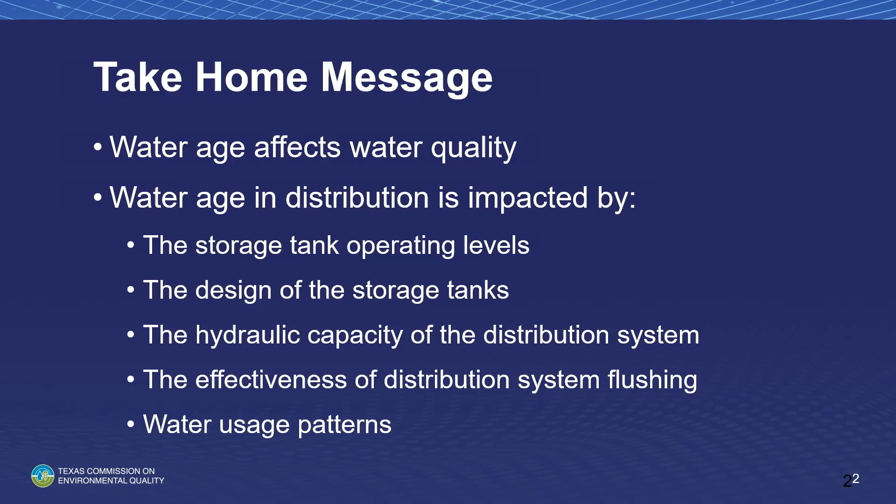What I want to leave with today is just a couple of take-home messages. Water age affects water quality, as you guys all know, and water age in the distribution system is impacted by the way you operate your storage tanks, how the storage tanks themselves are designed, the size of the lines in your distribution system, their hydraulic capacity, and the water consumption, and the effectiveness of your distribution system flushing program. We're going to try to cover all of these things very quickly today, but like I said, if I miss something, come up at the end and augment.

Excessive water age in storage or distribution, as you guys typically experience, results in lower disinfectant residuals throughout the distribution system. And it can be localized, not just the entire system. You can have localized pockets. As the water ages, disinfection byproduct concentrations gradually rise. So, well, for THM levels, they gradually rise. For HAA levels, they gradually decline. But you might see a difficulty in meeting your THM requirements if the water age in the distribution system gets really excessive.

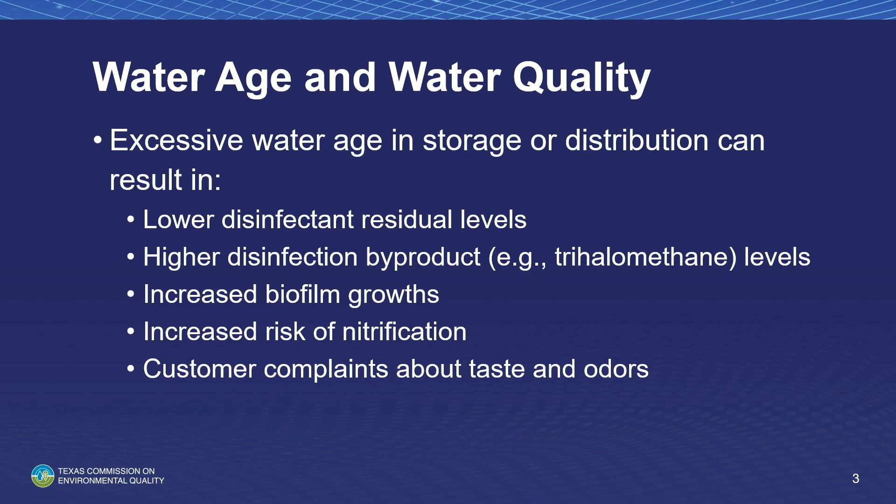As the disinfectant residual declines, biofilm growth increases. So, in association with the loss of disinfectant residual, especially if you're using chloramines, the chloramines convert and release ammonia. And there are certain types of bacteria that like to eat ammonia. So you'll get an increase in ammonia-oxidizing bacteria, and have nitrification problems in your distribution system.

And typically, if you can keep your chlorine residuals, your disinfectant residuals, fairly stable within a range of plus or minus 0.7, 0.8 milligrams per liter, whatever your normal is, you're not going to see a lot of customer complaints because they acclimate to the quality of water they're receiving. The quality changes, you start getting customer complaints.

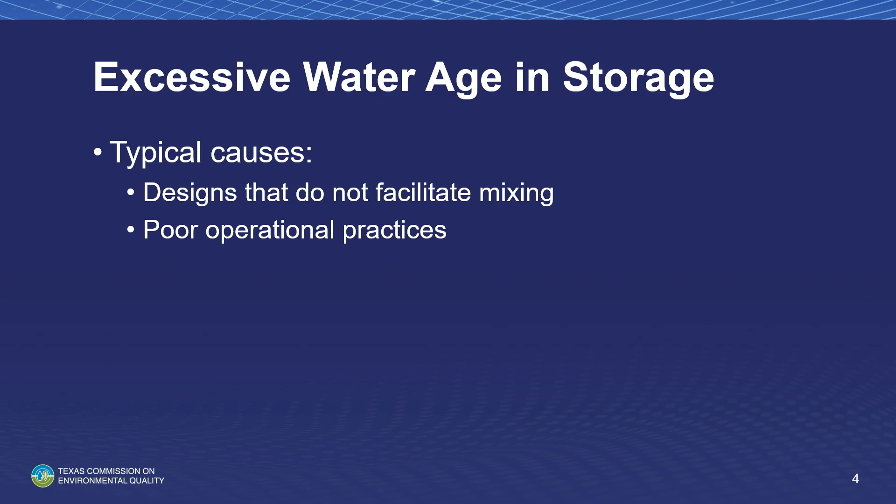Typical causes of water age in storage. The first thing is the tank really wasn't designed to circulate the water within the vessel. And then there's the operational practices. So the engineer can make a mistake and the operators can make mistakes. And the operators can do a lot of stuff to compensate for the engineer's mistakes, but the engineer can't do a lot to compensate for the operator mistakes. So you guys are kind of the last barrier to letting the water age get real high.

There are two kinds of inlet and outlet configurations. There is an internal or external riser, and in this case, this is an external riser where the pipe goes up the side of the storage tank and drops water in the top. And on the internal riser, water goes up to the top of the storage tank, but the top of the internal riser may be somewhat submerged below the maximum water level. Okay? Both of these things encourage circulation. And it means that the first in water is the first out water. So the oldest water leaves the tank first.

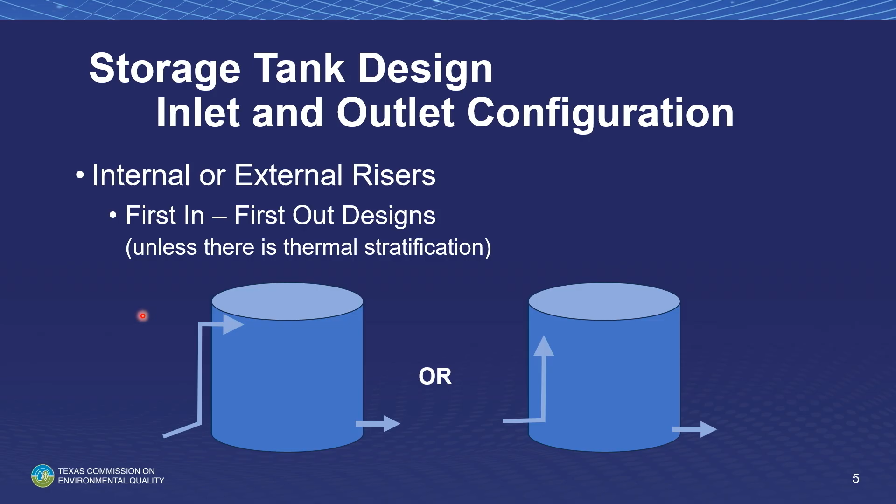Thermal stratification occurs when the temperature of the water inside the tank is not relatively uniform. This happens pretty significantly in tall storage tanks.

Especially ones with smaller diameters. The sun hits one side of the tank, the hot water kind of rises to the top of the tank where it just keeps getting hotter and hotter, and the cold water kind of sinks to the bottom of the tank. As little as a 2-degree difference in the water temperatures between the top and the bottom can result in this stratification of water.

It doesn't matter whether the water comes in at the top or at the bottom. If water comes in the top, it's going to be cool, and it will sink to the bottom. So it no longer is a first in, first out situation, it's a last in, first out situation. So thermal stratification is pretty important.

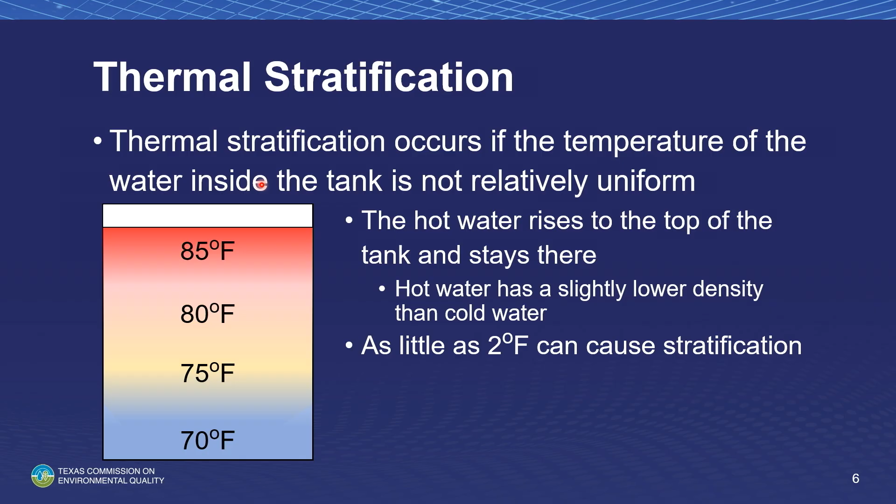The other type of design is the last in, first out, and that's basically a floating tank. Water can come in the bottom on one side and leave the other side, or it can come in the bottom and go out the bottom through the same inlet outlet. It can just basically be a floating tank. The way you can stop the short circuiting in this tank is to put a baffle wall in to force the water that comes in the bottom to go up over the baffle wall in order to get out of the tank.

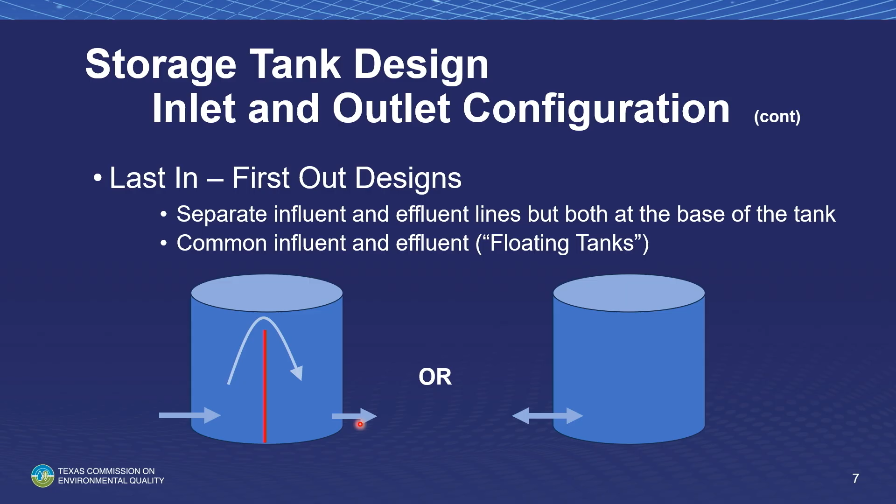So I can eliminate short circuiting in a bottom in, bottom out tank by installing baffles, either vertical baffles or horizontal baffles. In round tanks, I see circular baffles a lot, okay? So on the surface water treatment side, baffling is almost essential because you need the contact time. But it's even beneficial on groundwater systems in order to prevent short circuiting.

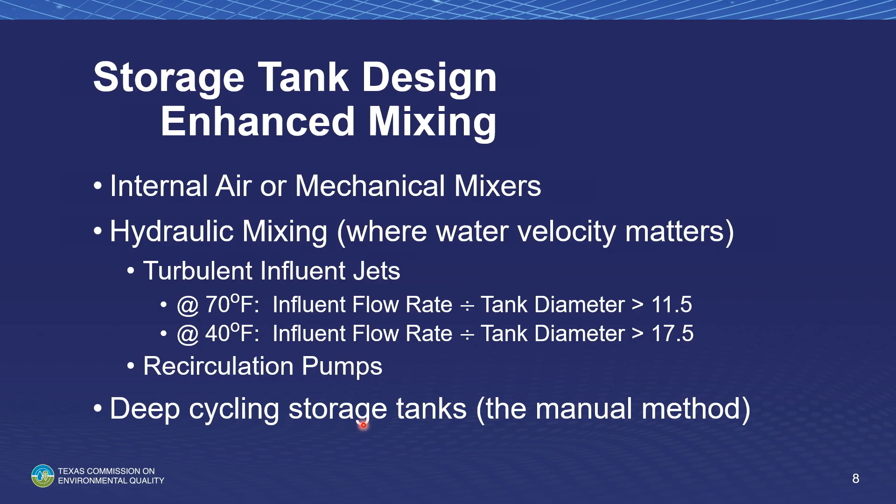Enhanced mixing. You can put internal air or mechanical mixers in a storage tank to stir the water inside the storage tank and circulate that water. Hydraulic mixing occurs where the water velocity is high enough at the tank inlet to create a circulation pattern within the tank, okay? You're generally not going to get enough velocity at the outlet of the tank to induce much circulation within the tank.

What I need is a directed flow, and when you're sucking for your service pumps, water's coming from this little pocket of water right by the suction for the service pumps. There's no drawing from the top of the tank kind of thing. It's all coming from maybe 1.5 feet from the suction pipe for your service pumps.

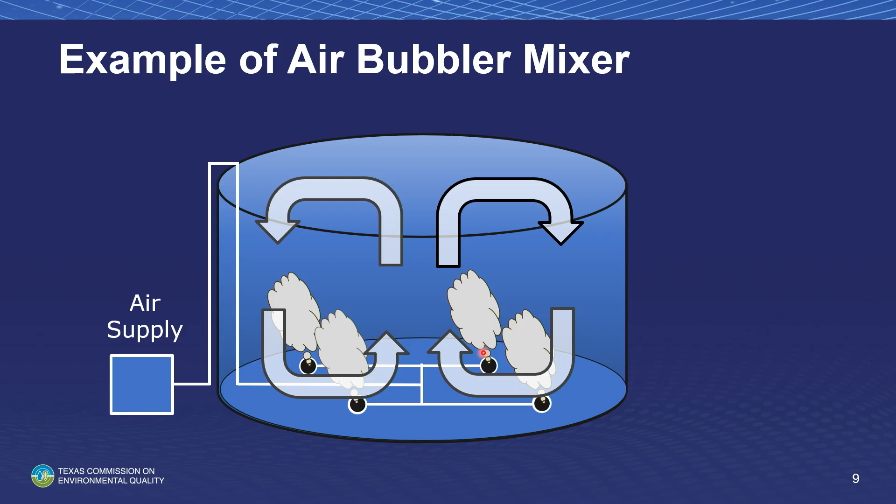All right. Here's an example of an air bubbler mixer. The air supply comes in the bottom, air gets released through these diffusers. As the air moves up, it sucks the water up with it and creates this circular pattern within the tank. Okay, does that make sense to everybody? I can do this with a mechanical mixer. It was just easier to draw a picture with air.

The other thing that can affect water age in the storage tank is your operating level. For elevated storage tanks and standpipes, it also affects the distribution system pressure, but it even affects it for storage tanks. There are zones within the storage tank that you guys intuitively know exist. There is the ineffective storage where I can't draw the water level any lower than this before my transfer pumps or my service pumps start sucking air, sending water to the distribution system. And I don't want air getting sucked into my service pumps. It causes pinging, and those little air bubbles destroy your impellers on your service pumps, as you guys know, okay?

So there's a piece of the ground storage tank where that water in that tank can't be used, okay? Above that, some systems want to have a reserve for fire protection so that I never draw into that reserve so that I can always fight a fire, okay? That's usable water. I just don't want to use it. And above that is the equalizing ground storage. It's the water that I can draw down and fill up and draw down and fill up. It's basically the volume that I have available to control water age in my storage tank. Does that make sense to everybody?

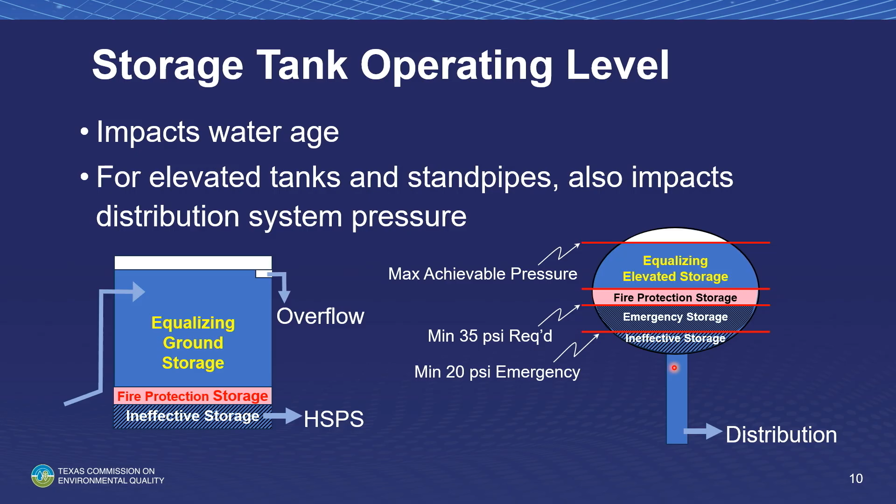Above that is the equalizing elevated storage tank, and above that is the overflow. And the overflow exists on both of those tanks. And the volume of the tank above the overflow elevation really is not usable storage, because as soon as you try to get the water level above that, water is going to run out of the top of the tank. So this is in an elevated storage tank. This equalizing storage volume is the stuff that you can really concentrate your efforts on adjusting. These other things are kind of constrained by the needs of other customers, including the regulatory people.

Deep cycling of water storage tanks is letting the water level drop as low as you can let it drop while maintaining your desirable distribution pressure. For some of you guys, the magic number is not 35 psi, it's 45 or 50 or 60 psi. And your effective storage is that level that is above that desired operating level, not the 35 psi. I mean, everything between that desirable level and your 35 psi is still usable storage. It's just not going to keep your customers happy. Okay?

You use the full equalization volume, whatever that depth is, to let the water level in the tank draw down. So when you have thermal stratification, you're forcing that hot water as low in the tank as you can get it before you put fresh cold water back in top. Now, thermal stratification will still be a problem because the cold water tends to stay at the bottom of the tank. You know, if the inlet pipe is small enough, it will jet and create circulation in the tank.

But in some really large storage tanks where I need a 36 or 48-inch distribution outlet, you may not get enough water velocity to cause circulation. You may have to put a mixer in that tank to circulate the water. There's just not enough velocity, okay?

Recognize the risk of drawing down into the fire protection volume. It's usable, but it's really not desirable. And avoid the emergency storage volume, that's the 35 to 20 psi number, if at all possible. And never, ever draw down into the unusable. If it's a ground storage tank, you're going to cavitate your service pumps. If it's an elevated storage tank, you're going to risk backflow events.

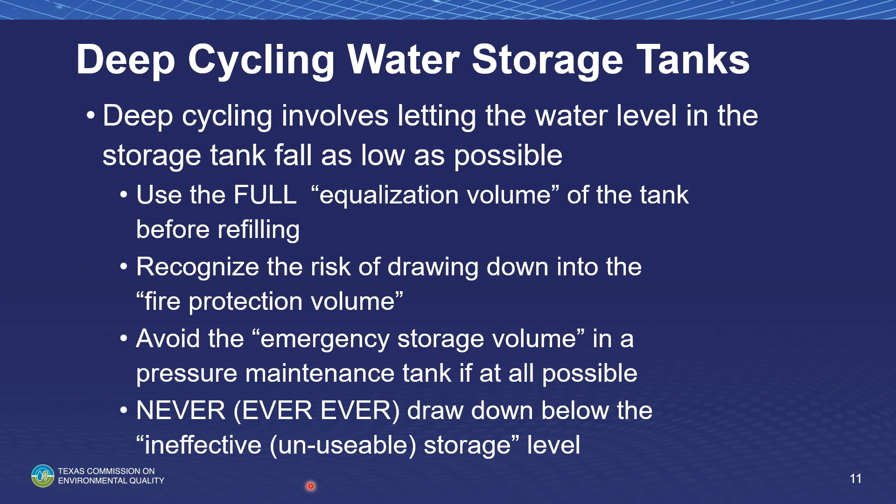So just don't ever consider that bottom little piece of that standpipe or elevated tank or ground storage, whatever it is, don't consider that as part of the tank volume. It counts from a regulatory perspective, but just doesn't count as a usable volume for you guys. Does that make sense? I mean, TCEQ excludes the part of the tank above the overflow when they calculate volume, but they don't exclude the part in a ground storage tank that you can't actually suck out. I mean, they include that in your volume calculations.

And if I'm saying that wrong, somebody from TCEQ better get up at the end of my presentation and correct me, okay? But I've been with TCEQ a long time. I'm pretty confident in that statement.

Typical causes of water age in the distribution system from a flushing perspective: I don't do a good job of flushing my pipe. I will open up the flush valve and move really old water from this part of the system to this part of the system, but I won't get rid of it, okay? It just moves the old water around in the distribution system.

And there are also seasonal differences in water consumption patterns. The chance of you getting aged water in the winter and spring are a lot higher than the chances of you getting aged water in the summer, because water demand by your customers will keep the water flowing through the pipes. Okay? I mean, you guys see that a lot.

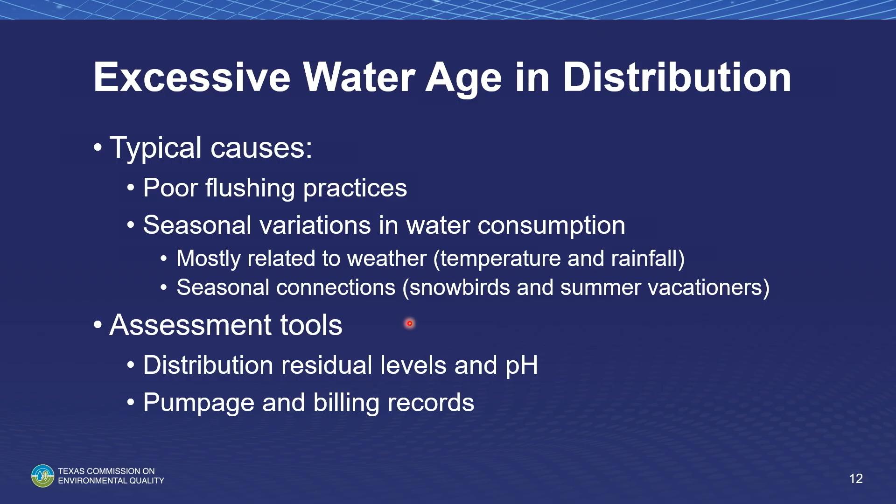Does that make sense? So your assessment tools will also include pumpage and billing records. What parts of town are using less water on a monthly basis than other parts of town? That will give you some insight into where I need to go monitor my chlorine residuals to make sure water age isn't becoming a problem, and where I have to start doing a more effective flushing program.

Residual type and stability. Monochloramine tends to be much, much more stable than free chlorine. Free chlorine is a volatile compound. Chlorine gas is a volatile compound. And whether you're using bleach or whether you're using chlorine gas, you put that into the water, you form hypochlorous acid when you're using free chlorine.

There's an equilibrium between hypochlorous acid concentrations and the amount of free chlorine, the gas that gets re-evolved back out of that system. Low pHs, lots of chlorine gas comes off. High pHs, not so much, okay? Monochloramines are stable over a huge range of pHs, okay? All right, temperature. Higher temperatures tend to accelerate residual loss. We've already talked about why.

Monochloramine stability. The only place that you can control the stability of your monochloramine is when you actually make the monochloramine molecule. If you make relatively pure monochloramine, the stability of monochloramine is pretty good. But if you don't keep that ammonia to chlorine ratio right, if you have a lot of excess ammonia going into the distribution system, if your mixing isn't good, you get dichloramine produced, or you get excess ammonia. Dichloramine decays at a much more rapid rate than monochloramine.

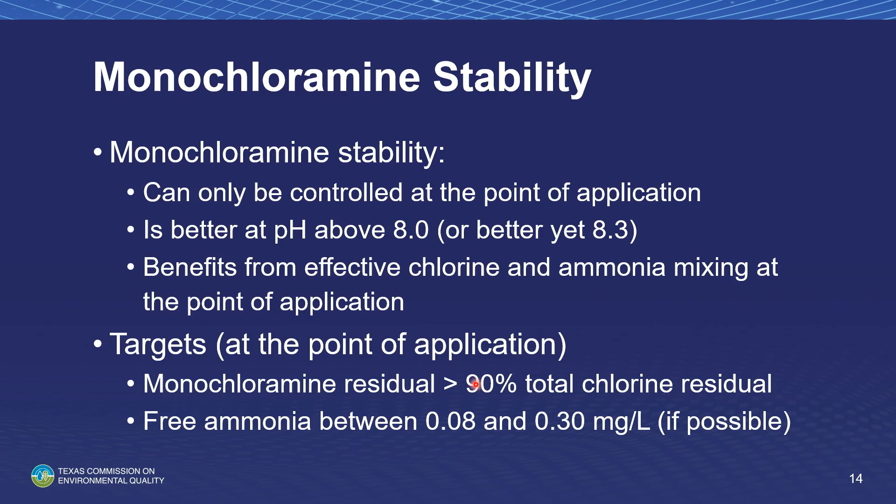So what I'm trying to get to is a monochloramine residual that is at least 90% of what the total chlorine residual is. I've seen plants that operate really close to 100, and I've seen plants that operate successfully at 80 to 85. So 90% is a good rule of thumb, but don't take it as gospel.

I mean, your system depends, but you get below about 80%, you ought to be looking at, I need to improve something. I need to raise the pH to 8.0 or higher, preferably at least 8.3, so that I slow the reaction down between monochloramine and free chlorine, and I improve the reaction rates between free chlorine and ammonia, okay?

I see people giving me the eye. That's an oversimplification, but a pH of 8.3 or higher really improves monochloramine purity, okay? Free ammonia somewhere between 0.08 and 0.3 if possible.

There are places in West Texas that have something in the water that combines with the free ammonia, so they tend to leave their treatment plants with a higher measurable free ammonia concentration, and they're still in the greater than 90%. They try to drop that ammonia level down to 0.1 or 0.15, they start spreading the difference between mono and total. And that's not a good thing. If you need to leave with a 0.3, leave with a 0.3.

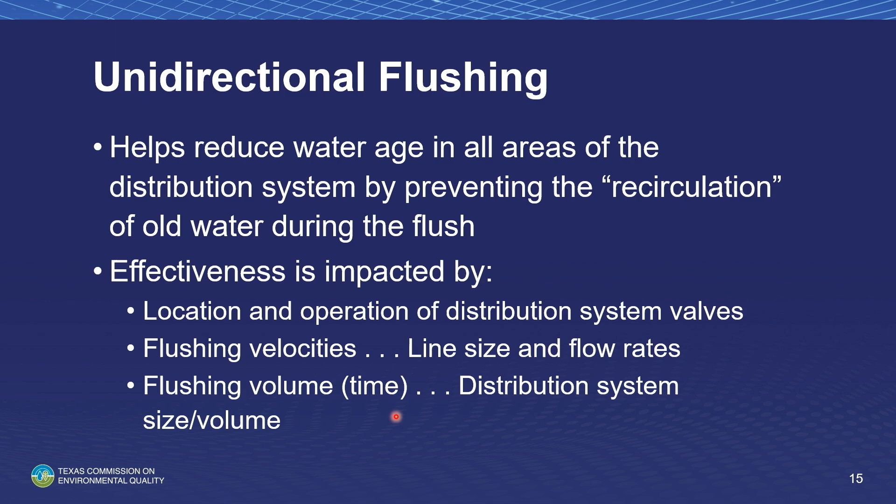Flushing volume, time. If you have a long segment of line, you need to flush for longer. You know, it's a function of velocity versus volume of the pipe. Time is determined by how fast the water moves through the pipe and how big the pipe is. Okay? Distribution systems are complex.

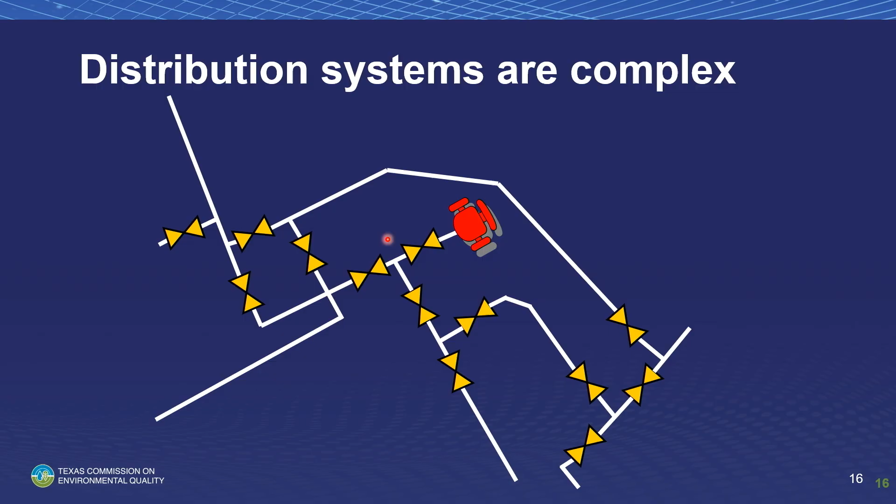In order to do a unidirectional flushing program, you have to actually plan, okay? It requires a thorough understanding of the distribution network. Hydraulic models are not essential, but they really, really help, okay? They will tell you what parts of the distribution system water is going around because the line sizes are smaller, or the number of customers is lower, or water consumption pattern based on your billing records indicate that these guys just use less water, okay?

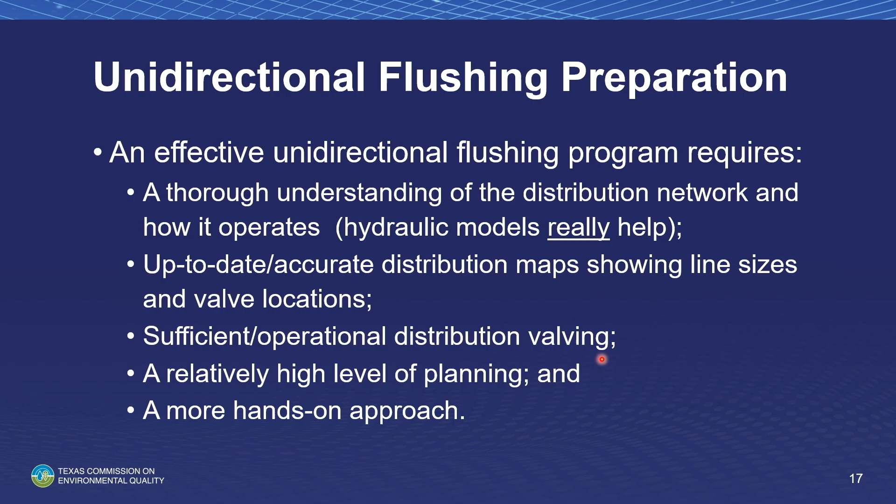Up-to-date and accurate maps showing the sizes of the lines and the valve locations, and you got to have sufficient operational valves. If you don't have enough valves, it's going to be really hard to do a unidirectional or even a semi-unidirectional flush. And it requires a relatively high level of planning, because when you start doing unidirectional flushing, you're flushing large volumes of water. You don't want to do that between 5 and 7 p.m., okay?

All right? You want to try to flush in the early mornings or in the very late evenings if you can, or in the middle of the day. You know, you just try to avoid when everybody's taking a shower or when they turn their sprinklers on, okay? And it requires a pretty hands-on approach. You've got to go turn the valves. And then you got to remember at the end of the flush, go turn the valves back on. Otherwise, you're going to create all new dead zones that you don't know and you'll never be able to figure out because you think an open valve is actually closed or a closed valve is actually opened.

Unidirectional flushing, before you start the flush, you need to prioritize the areas that need to be flushed more frequently and the areas that need to be flushed first. When Alicia talks about the nitrification action plan and flushing for the NAP, she doesn't tell you to start at the end of the system and try to completely flush the whole system through the valves at the end of the system. Start flushing near the plant, get that part of the system with fresh water in it, and then you can take that fresh water out further and further into the distribution system. Did I say that right? I did say that. Okay, very good. Okay.

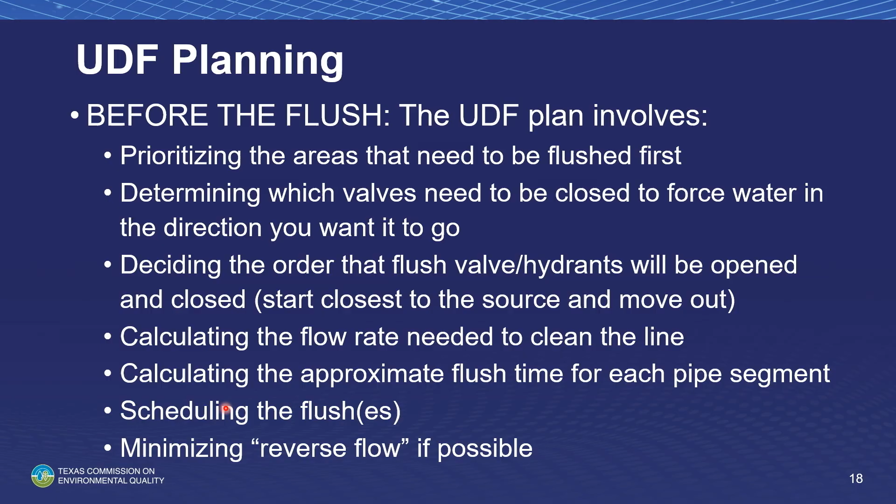Calculate the approximate flush time for each pipe segment. Schedule the flushes so that you're not flushing a whole bunch of water all simultaneously. Work yourself through the system. Don't try to do a unidirectional flush all at once, okay? And then try to minimize reverse flow. If there are parts of the system that feed back into the part that you're flushing, be sure you isolate that part of the system that feeds back. Make sure the water goes in the direction that you want.

Don't reverse flow in your pipe. The sediment all gets laid down in the direction of the normal flow. You change the direction of the flow, water reverses in that pipe, stirs all that sediment up, okay? So try to keep water going in the same direction that you normally operate the water system in.

During the flush, use the opportunity to deep cycle your ground storage tanks. Don't just turn your service pumps on and keep the elevated storage tank completely full while you're flushing. Keep your service pumps off as much as you can to allow that elevated storage tank to drain down and flush the water.

Now, I don't want to move water from the elevated storage tank, reverse flow it into a part of the system that never sees elevated storage tank water. It always sees plant water. Don't try to flush that elevated storage tank back into the plant water part of your system, because it will reverse the flow direction. Collect data, record the starting and ending times of the flush.

If you can, get a flow rate, put a flow meter on your flush valve. If you can't, get a pretty good estimate of how big the pipe is and how far out the water goes before it hits the ground, and figure out the approximate flushing velocity.

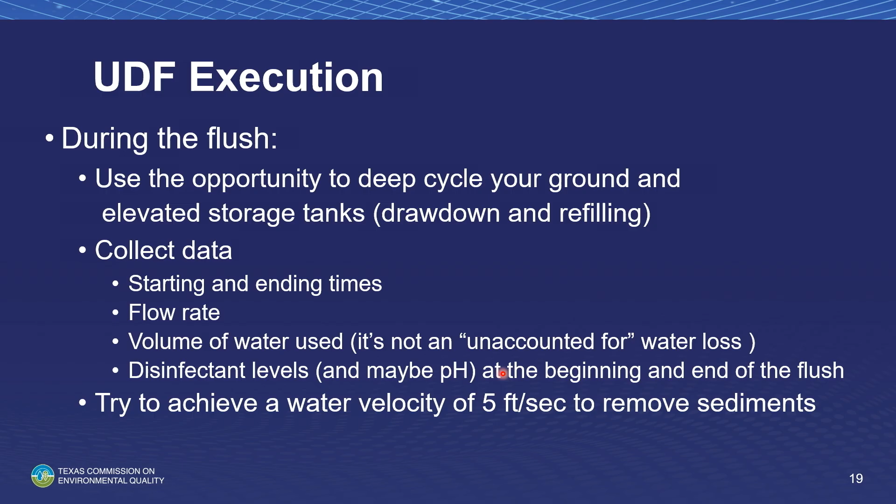Water usage pattern, you have seasonal use. Remember I was telling you that drawing the storage tank down is probably more important during the fall and through spring than it is during the summer months. But look at your average daily demand during whatever period between flushes. Look at your peak daily demand, and if you can determine what your peak hourly demand is, that will tell you, I don't want to flush during these periods of time, okay?

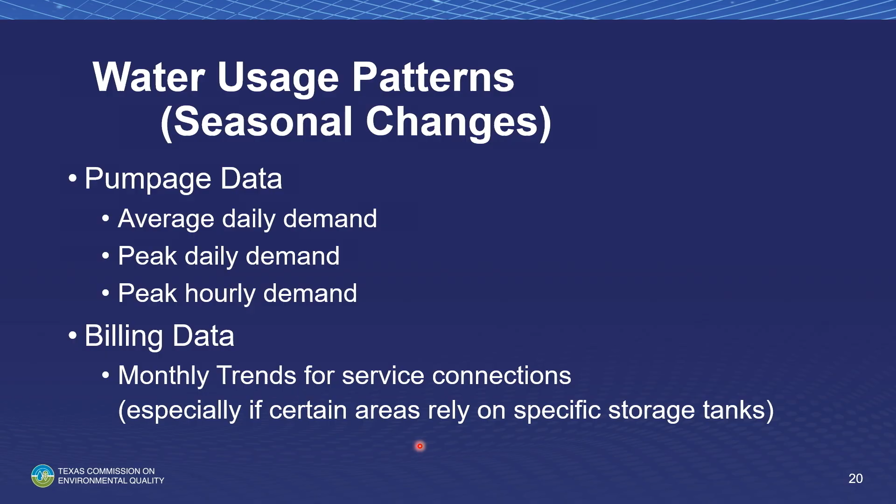And billing data. Keep track of all of this data, it's kind of important that you do, but look at your monthly trends for seasonal changes. I use 30% less water in March than I use in the summer. I'm going to need to increase flushing in March, likely. I'll have to increase flushing in March and reduce flushing in the summer, assuming that your residuals are okay.

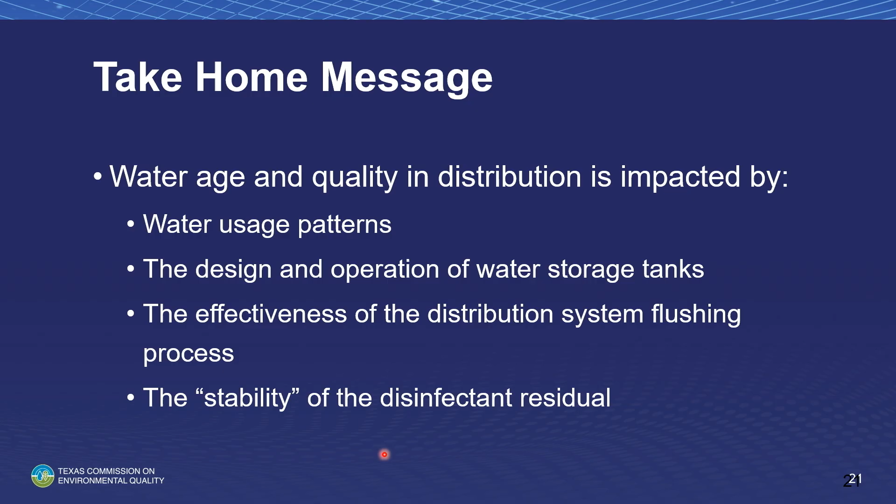Bottom line, water age and water quality in the distribution system is impacted by your usage patterns, the design and operation of your storage tank, the effectiveness of your distribution system flushing program, and the stability of the disinfectant residual that you are using. So make pure chloramines if you can.

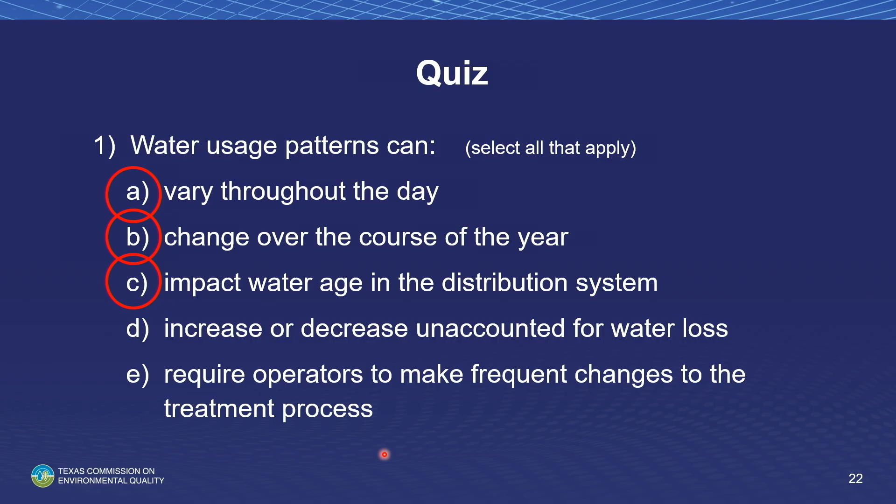Water usage patterns can, certainly, but it doesn't impact, increase or decrease unaccounted for water. And they rarely require the operators to make multiple changes through the day. Operators rarely have to turn the disinfectant residuals up in the morning and down in the evening, or up in the evening and down in the morning. These are seasonal changes. Water age is not something I'm going to control at the production point.

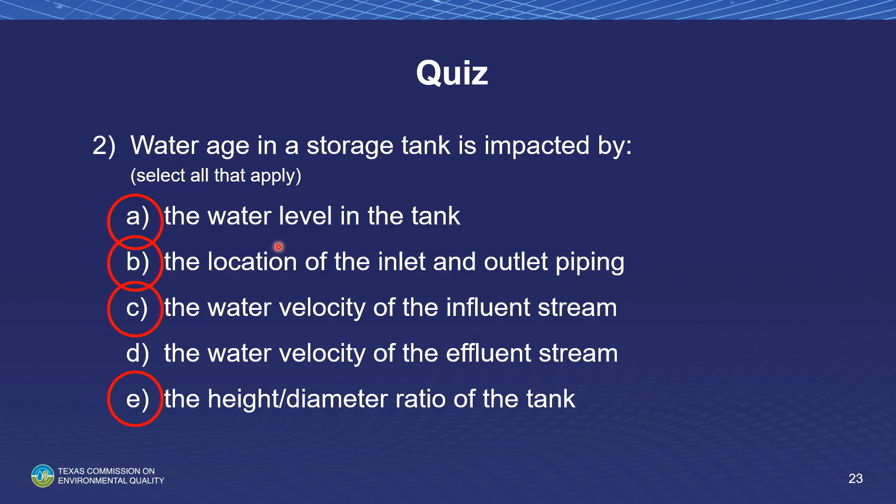I'm going to control it within the distribution system. Water age in the storage tank is impacted by, remember I talked about water velocity at the suction, the outlet of the tank? Really doesn't cause circulation within the tank. Water velocity at the inlet can, okay? The location of the inlet and outlet piping, the last in, first out problem, okay? And the height and diameter ratio of the tank.

I really didn't talk much about that. But the larger diameter of the tank you have, the more difficult it is to create a circulation pattern in the tank, okay? Really tall tanks have extreme difficulty maintaining circulation patterns. Cold water will enter the top and sink to the bottom and really not create a circulation pattern, okay?

Tank mixers. I didn't do a good job of explaining this. They don't reduce the average amount of time in the tank, okay? If I have a really short residence time in the tank and a really long residence time in the tank, I get the same average number as if I circulate the water in the tank. Just some of it's in there a really long time, and some of it doesn't stay there but a minute or two. So the average stays pretty much the same.

But it does affect the maximum and minimum amount of time in storage. It doesn't increase the potential for thermal stratification. It actually decreases thermal stratification. It does not increase biofilm. It actually reduces biofilm. Old water sitting at the top of the tank will lose its chlorine residual.

We actually went to a water system where the elevated tank floated on the plant, but the plant was really close to the elevated storage tank, and when they turned the service pumps on at the plant, water went right on by the storage tank and out into the distribution system, and that tank stayed full. It may drop a foot before the next service pump cycle, but it doesn't drop a lot because the elevated tanks out in the distribution system are dropping. That turns the service pumps on, not the water level in the tank nearest the plant.

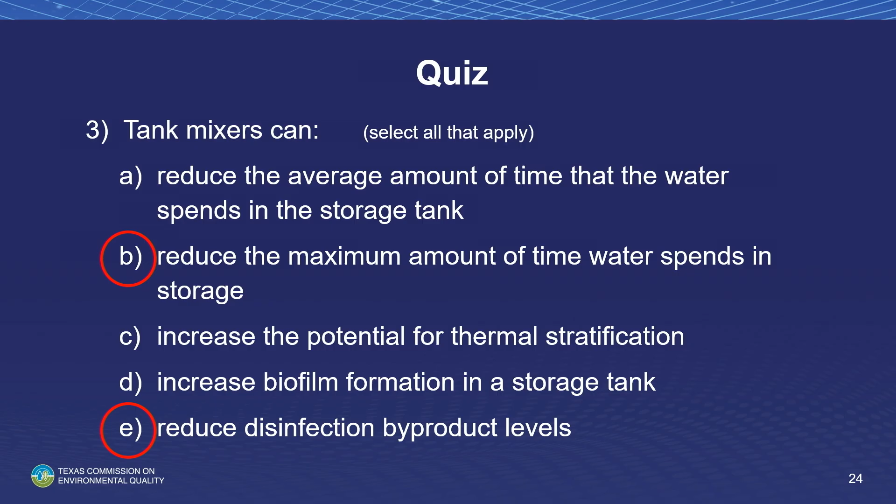If you have questions about water age and the distribution system, there are people in the plan review section that can answer your questions, or the TROT team. But really, your primary point of contact will be the optimization staff. If you've got some really good field investigators, they will have enough experience trying to help people and cite violations that they might be able to help you, but these guys are the primary points of contact.